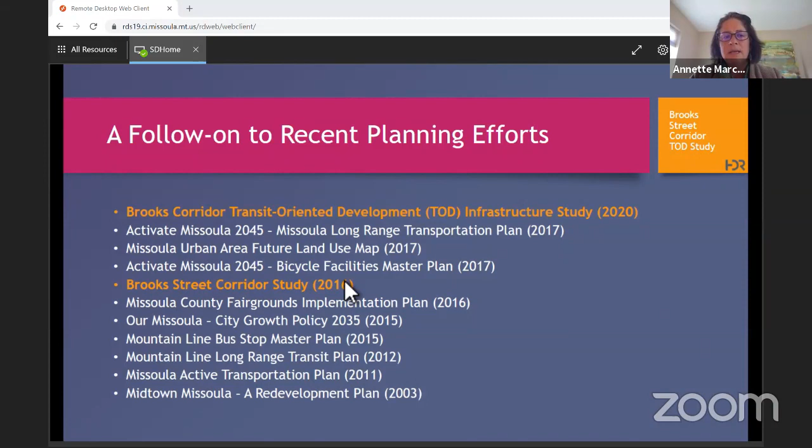This TOD study that we're presenting today, funding was provided through a whole coalition of groups. MRA has funding, and Mountain Line, the city's development services, so the transportation department and land use planning department, the county provided funding, and the Midtown Association provided funding.

And collectively, and I think you're all aware of this, there's a group that we've referred to ourselves as the Midtown Mojo Group, that is a collection of city, county, Midtown Association, Mountain Line, MDT, a whole collection of folks, we've probably numbered up to maybe 15 people at any given time. So it's a broad coalition of groups and folks who are participating in this vision and all working together on this.

So the study area, and this was established in the 2016 Brooks Corridor Study, extends for approximately 2 miles between Reserve Street to essentially the southwest, and Mount on the north. Loosely, the 2016 Brooks Corridor Study extended approximately a 1/4 mile to either side of the Brooks Street corridor. This study primarily focuses just on the Brooks Street corridor, but takes a look a 1/4 mile on either side with regard to things like bicycle and pedestrian connectivity. And are there opportunities perhaps to close some streets, to consolidate curb cuts, to simplify some of the issues, especially traffic issues that are occurring on the corridor.

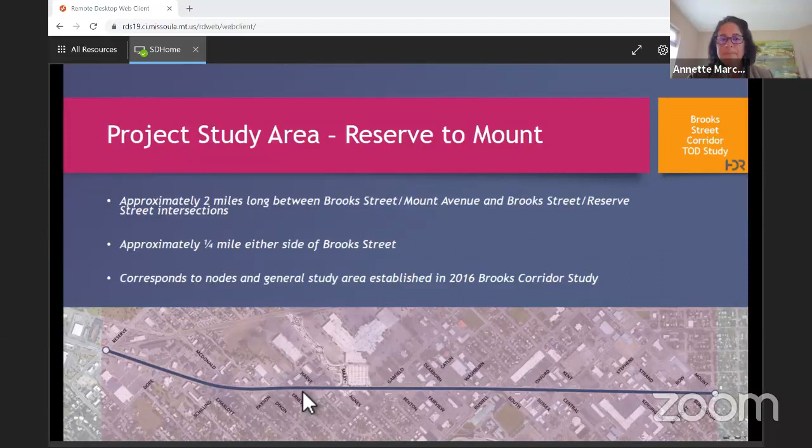So with that, Tim, maybe I will turn it over to you just a little bit to talk about how HDR approached some of the existing conditions and some of the things that you found. And then we can just kind of proceed from there. Yeah, sure. Everybody hear me okay? Mm-hmm. Great. Thanks for having me, and thanks for the good introduction there, Annette.

So the basis of starting with the existing conditions is, again, building on a lot of the studies that have already been completed, and then looking at publicly available information such as cadastral and other things, especially from a right-of-way perspective, as the right-of-way constraints change throughout the corridor from Reserve up to Mount. We took a few steps further on the previously completed studies from a land use perspective and development opportunities. So we worked through a few of those tasks and additional information to expand upon those as well.

Also had a few of our folks, both from a planning level study expertise area but also from a transit expertise area, walk the corridor, look at pictures, try to be present to physically watch how pedestrians are interacting within the corridor, how vehicles are interacting within the corridor, look at how approaches are functioning, both from an ingress and egress perspective. And then leveraging that to really put together as much of the data as we can to bring forth to the working group as we started developing the plan. I think we can go to the next slide.

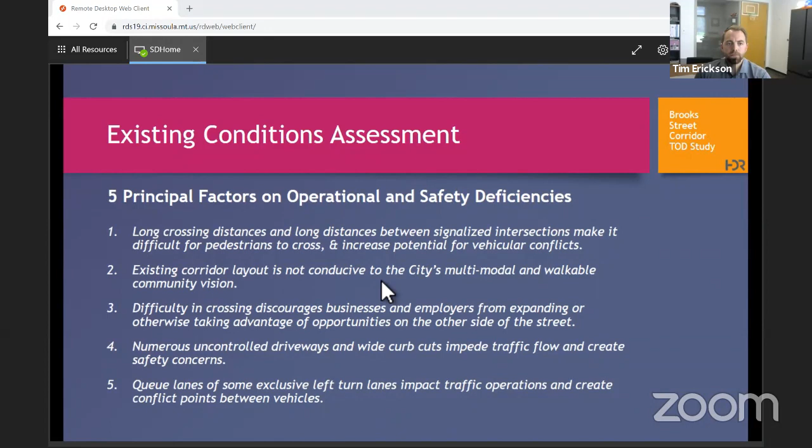So overall, with the existing conditions assessment, heavy traffic volumes, numerous driveways, high crash rates, and the lack of pedestrian and bicycle accommodations really is what set that foundation of coming up with what we're now saying is transforming the Brooks Street corridor.

And I think it's important to note, to me, this was a really critical phrase that came through in the report. It's not functioning, we may think it functions fine, but it really has so much more potential, and it's really not functioning up to its community resource potential. I mean, we all know that, but that was something really important to reinforce.

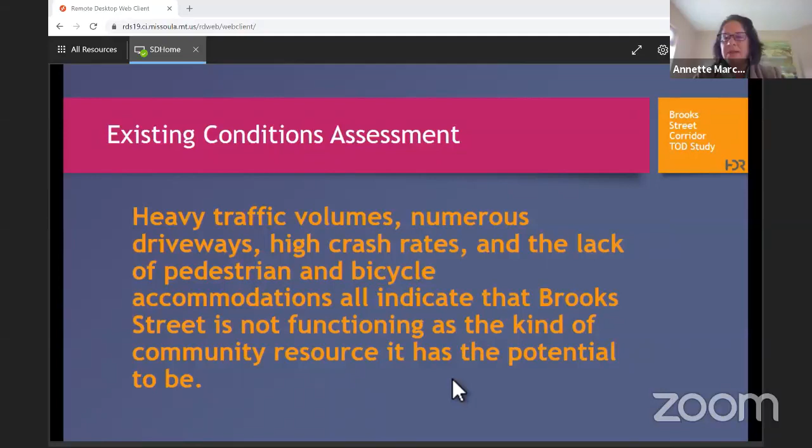So making the most effective use of existing right-of-way. We mentioned the right-of-way constraints already, and there's definitely going to be further analysis needed to get a detailed account of potential right-of-way impacts. But the goal would be to make as many improvements within the existing right-of-way as possible. Define access improvements to enhance safety, while also maintaining or improving overall visibility and accessibility to businesses.

Providing safe and more frequent pedestrian crossings on Brooks Street. So being able to, again, provide those opportunities for the multimodal users, the non-motorized users within the corridor, that can encourage that use within the corridor there. Creating a corridor identity through the placemaking. Again, that's with the streetscapes and the landscapes.

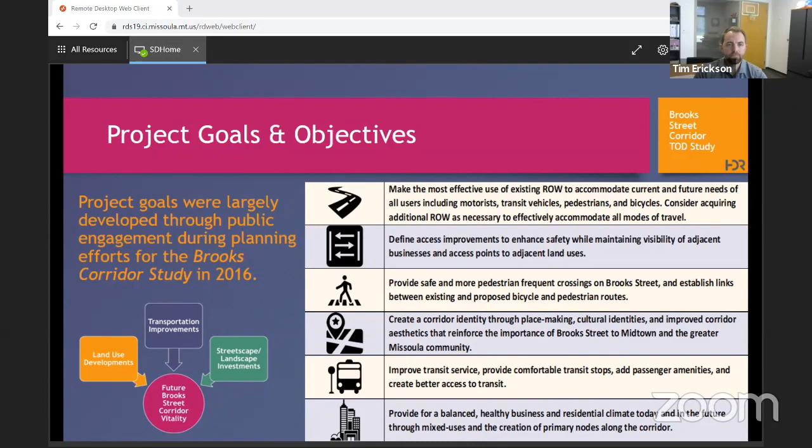I don't think so. Most of this information came right out of the report, and so when you have the full report in front of you, you can spend more time really sifting through it. But I think the important thing is what Tim just touched on, the four big issues that it synthesizes down to: we need to address connectivity, we need to address development at those established or identified development nodes.

We need to address safety and access management, and then in order to make this a place not just functional, but a place where people want to be and want to spend the time, really take a look at the aesthetics and the visual relief. So the streetscape and the placemaking of the street.

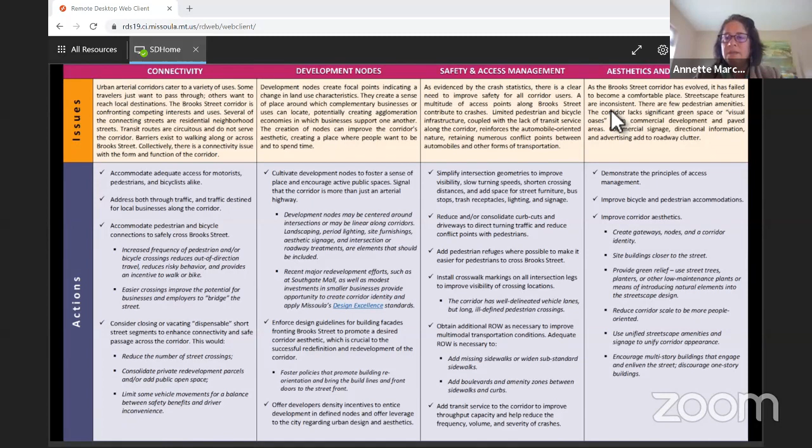So in the next few slides, we'll get into how we started looking at alternatives and what options are available for transforming the corridor. And that started with the basis of our design concepts. Again, pretty much a summary of things that have already been mentioned: extensive field reviews, understanding what current constraints are, overall baseline conditions of the road, the intersections. We did some baseline traffic studies, gathered as much information as we could from the previous studies as well. Overall input from stakeholders and local governing entities.

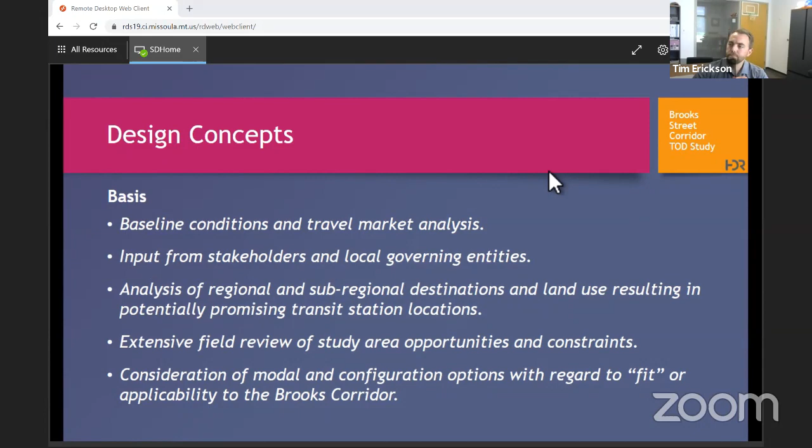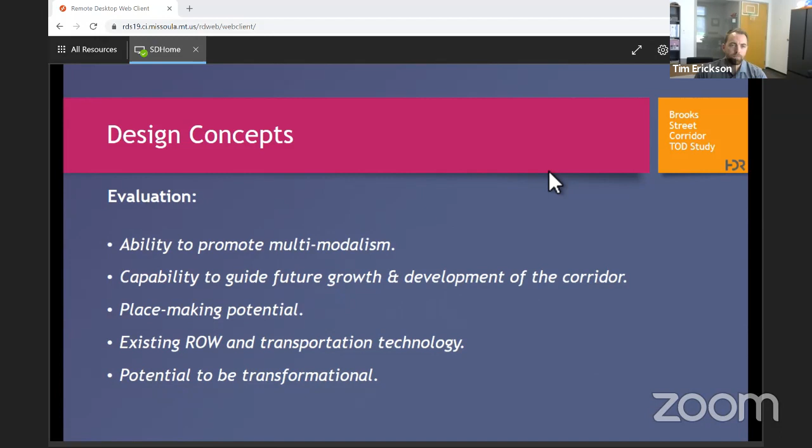So through the evaluation of our various design concept alternatives: ability to promote multimodalism, capability to guide future growth and development of the corridor, placemaking potential, existing right-of-way and transportation technology. I think that's an important one to remember. We use the term, I believe, future-proofing the corridor. So understanding what technologies we know of, but also knowing that technologies change, and how does that play a role in the future of transit-oriented design, and also the bike ped and also for the vehicles. Can't forget about the vehicles using the corridor as well. And then the overall potential to be transformational.

Mm-hmm. Yep, go ahead. Thank you.

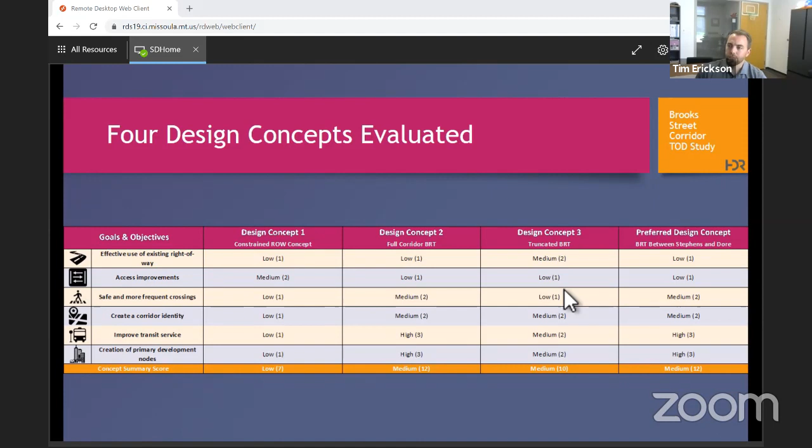So overall, we came down to 4 design concepts to be evaluated. In reality, it was 3 design concepts, and the 4th kind of morphed from the initial 3. Design concepts 1, 2, and 3 were the initial ones that were developed. I believe the graphics on the next slide get into them a little bit more. We looked at them and then ranked those based on the criteria, goals, and objectives that are shown off to the left-hand side. So design concept 1 is the constrained right-of-way concept. And I'm just gonna pull up the overall report separately on my screen that you can't see.

Again, you can read about this more later, but for design concept 1, we looked at infrastructure design concepts focused on improvements mainly to the intersections within the corridor limits, so within the Reserve to Mount corridor limits, providing bicycle and pedestrian facilities and amenities. In this case, transit would actually stay within the existing travel lane. So this was focused a lot more on bus stops off on either side of the road, and then looking at signalized improvements and access improvements to improve the safety of the corridor for all users, as well as maintaining the vehicular traffic on the corridor.

The second design concept, which we're terming the full corridor BRT. BRT stands for Bus Rapid Transit. This is looking at having a center running BRT right down the middle of the corridor. Think of where raised medians generally would be, right in the center of the roadway, having buses run on dedicated 15-minute headways, and they have a dedicated travel lane within there.

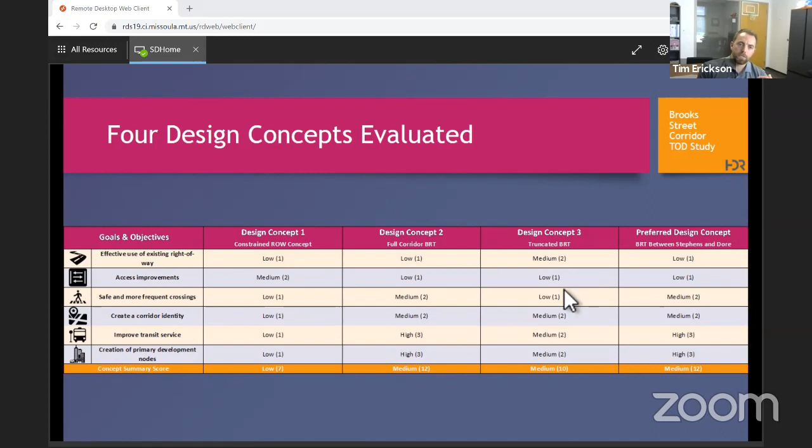What ended up becoming the preferred design concept is actually kind of a mix between design concept 1 and design concept 2 to an extent. We focused a lot on intersection improvements while also being able to incorporate a center running BRT lane. One primary difference between this concept and concept number 2, and you might be able to see it on the graphic that's on the screen, is on the southern end, the center running BRT would end at Dore Lane.

And this was through collaboration with Mountain Line. Obviously there's need for accessibility to Walmart and other locations there, and if you continue to Reserve, it could actually cause some complications of trying to get from a center running BRT through Reserve, making the turns either on Reserve or down further to other areas that transit wants to serve. And so we actually found that terminating the center running BRT at Dore Lane provided some enhanced opportunities for transitioning in and out of that center running BRT.

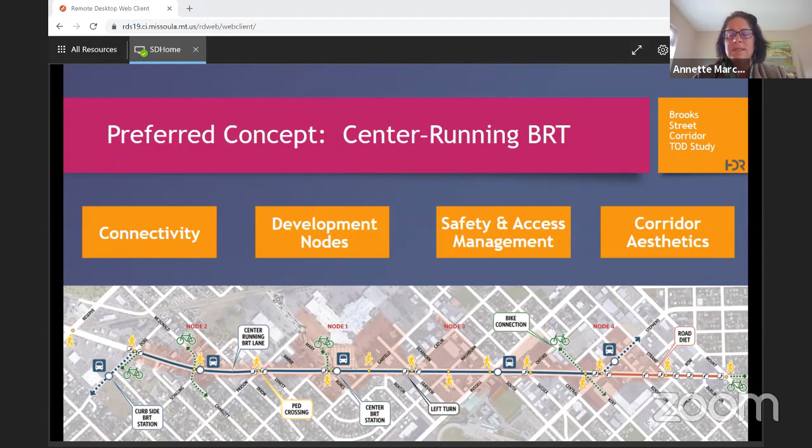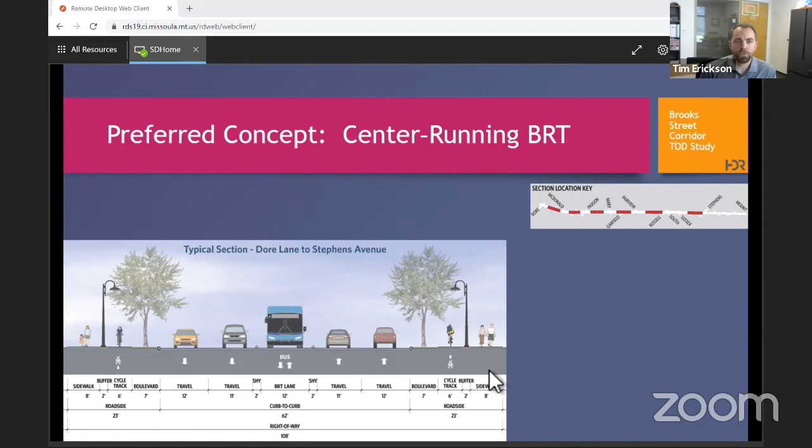So an example of how it accommodates future needs is if you only wanted to install a sidewalk and accommodate the right-of-way based on that, then in the future, if there's a substantial uptick in the non-motorized users or wanting to look at opportunities to have a cycle track or multi-use path, then there wasn't enough right-of-way or enough available space planned for from the beginning to accommodate that. So we wanted to take this to a grand vision, again, transforming the overall corridor. And you can see that with these typical sections.

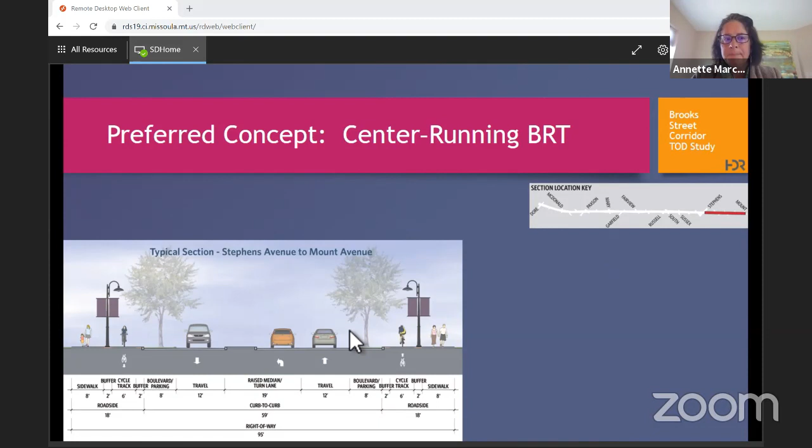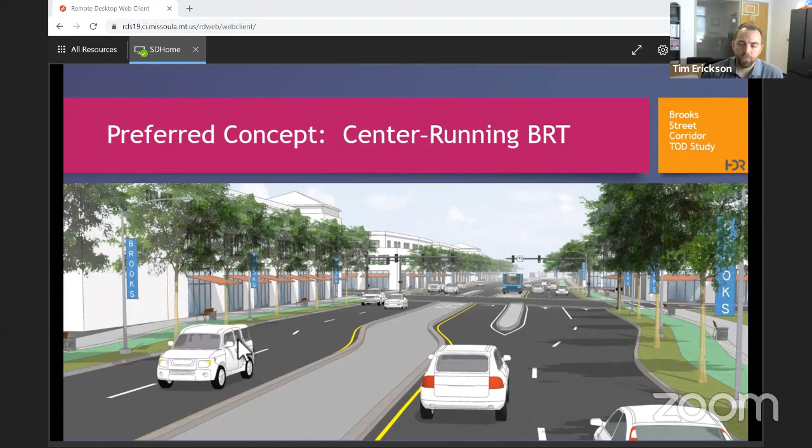So probably not a lot more to narrate with these next few, but just a few seconds on each one of these next few slides, just to really help portray the vision that the group came up with as we developed the overall plan that, as Annette alluded to, was finalized towards the end of last year.

Nancy, you have a question? Mm-hmm. I'm sorry, I'm having a little difficulty with this concept. It appears from the drawings that the buses are going in the opposite direction of the traffic for the side of the street that they're on. Is that right? If you go back. Right here. So these cars are coming in this direction, but the bus is going in the opposite direction.

So in that particular case, we can talk about that in more detail. And I'm not a transit planner myself, so apologize if I don't have the exact answer. But more importantly, this shows that it's probably aligned specifically for how a station would want to transfer its users, based on how these stations get placed. And this is the only place that has them on either side. I think that we could work that out, and quite frankly, it could be something that accidentally got flipped just in the rendering itself.

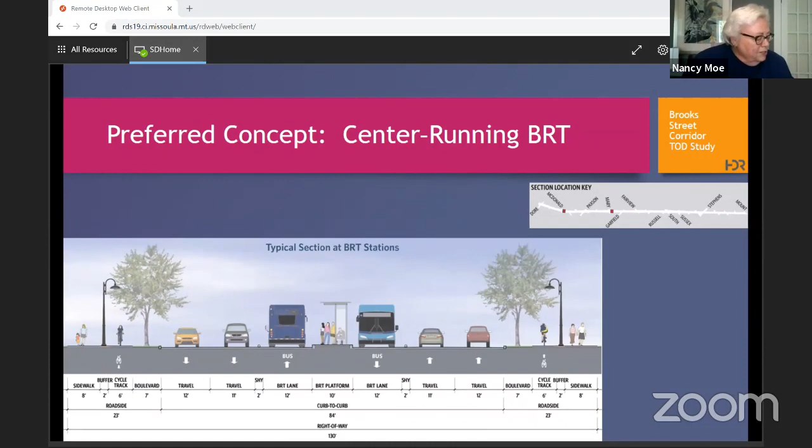But I have another question, and that has to do with Reserve to Dore Lane. And I understand this map and what it is trying to do with that. But is there a transition, I guess you'd be coming north on Brooks from Reserve to Dore? Is there a transition necessary there? I mean, all of a sudden we have a center lane BRT.

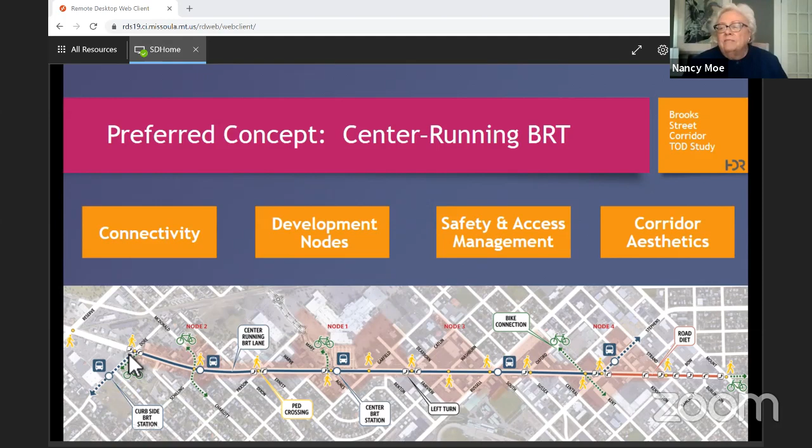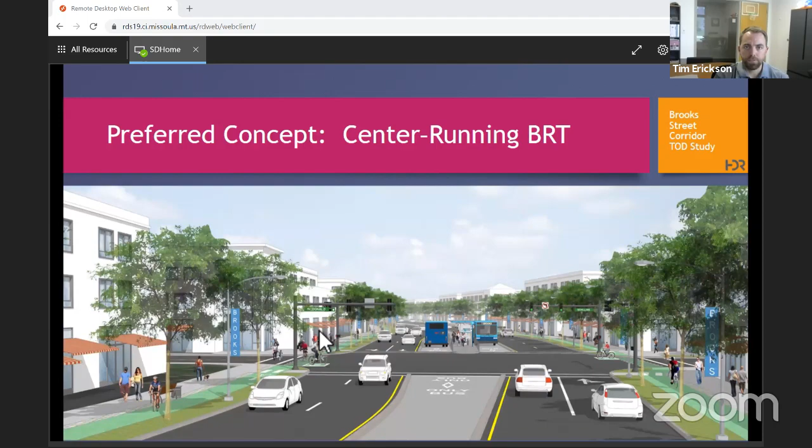Yep, that's a really good question. So there is a transition. There's a few different options, and really we tried to address it more in the text, I believe, in our study, that the transitions are required in the locations across the United States that have center running BRT. We can provide some pictures and things there, but as far as the transition, yes.

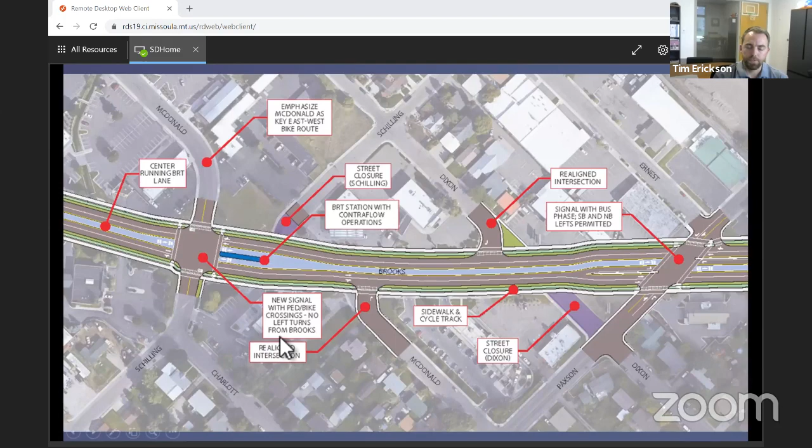So you actually work it into a dedicated phase in the signal itself that allows buses to get in and out of that center running at those specific locations, and also on the north end as well. So not just here, and you set up the signals appropriately to accommodate the in and out, while at the same time having minimal impact to the vehicular traffic and not causing any additional confusion or issues for the non-motorized users, and not increasing the overall conflict opportunities there.

Okay, thank you. Just to clarify for me, are we being asked to agree with this concept so that HDR can go forward based on this concept to accomplish what is stated in the motion, engaging MDT and determining right of way needs and impacts? Are we being asked to agree with the concept, the preferred concept? Yes. Thank you.

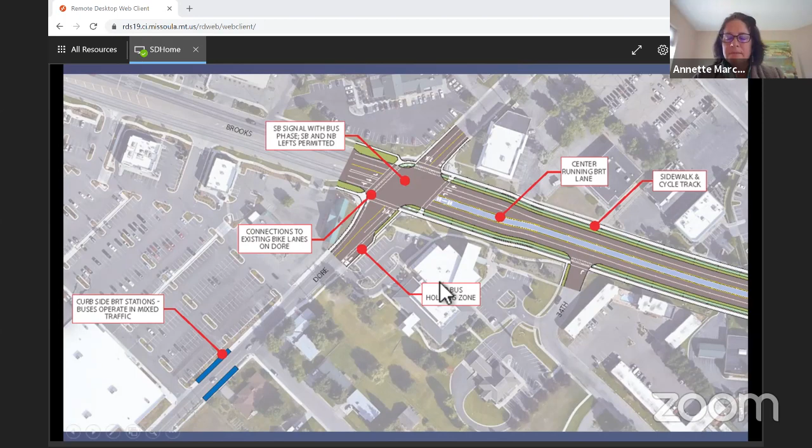Thank you, Carl. Any other, or Annette, are you guys done? Any other questions? I'm done, thank you. What about any other questions from any other board members? Yes.

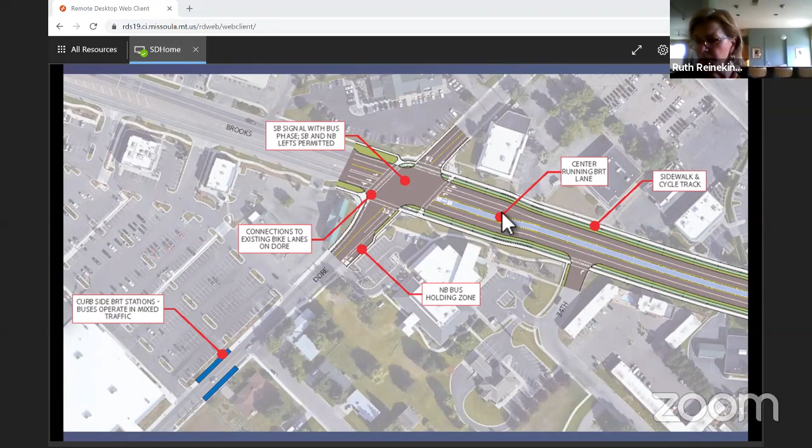Not so much questions as maybe some emphasis on a couple of points that have already been made. You had a slide early on about the existing conditions assessment, and number 3 mentioned the difficulty in crossing that discourages both businesses and employers from expanding to take advantage of opportunities on the other side of the street. And it's good to keep in mind that the Puma study identified that there are 2,000 businesses along the Brooks Street corridor that employ 17,000 people.

Those are a lot of people that could utilize the bus system if it's running consistently, whether it's down the middle or on the lanes, but if it's consistently 15-minute bus service on Brooks itself, that's a lot of people that could utilize that. And in that area, there's also a population of 16,000 people for which Brooks is a definite corridor for accessing the other side of the street. It's a barrier.

And I think the safety aspects of being able to breach that barrier are worth emphasizing. The opportunities for economic development with the permanence of the bus, and knowing that Missoula is going to continue to grow, are really quite great, and that needs to be emphasized as well. What didn't get mentioned is the function of Brooks Street: we say it is functioning, but studies have shown that 20 years from now it's going to be maxed out, and the time to address that is now. So I'm very much supportive of this, and thank you for the presentation.

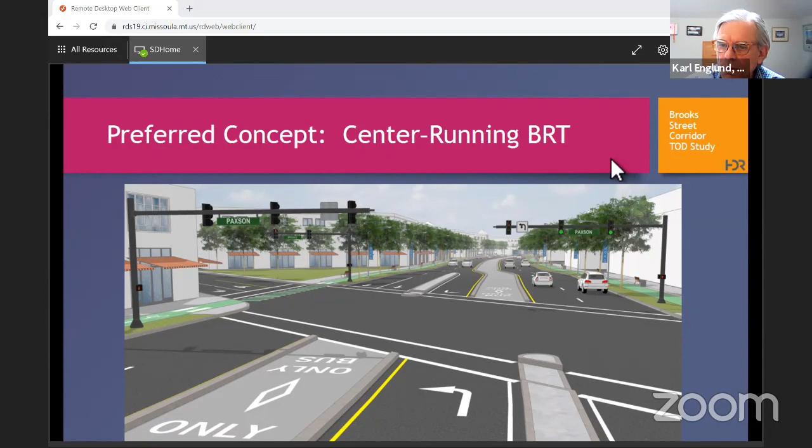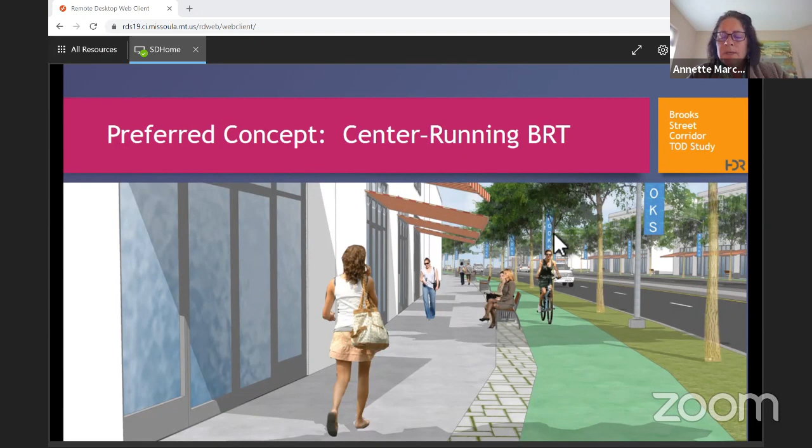My question, if I may, is does the $30,000 that we're asking to spend right now get us to those points? We think it does. Well, so initially, when we had completed this study and had a center running concept that we thought was worthy of, and I think Ellen really nailed our thought process.

It seems to be a very transformational concept that addresses a lot of the existing issues with the corridor right now. But we don't know how feasible it is. And so we know the things that we need to study to understand whether it's a feasible concept. But rather than undertaking a full study with all of those pieces, we know that there are probably two of the most fundamental issues that we need to understand.

How accepting of this concept will MDT be, and can we get them to come to the table as an active partner? And we don't know that. We just don't know that. We've had representatives from MDT on the Midtown Mojo group, but in order to get full buy-in from MDT, we probably need to go higher up in the agency. And we just haven't gone there yet.

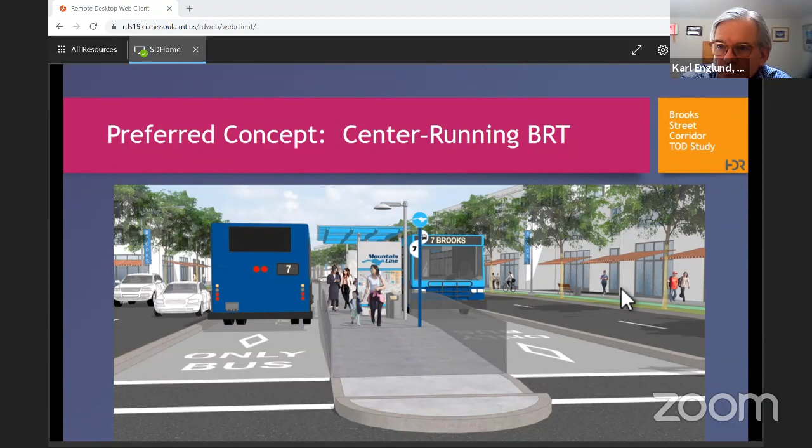Anything else from anybody? Questions? Jill, if you would, we'll probably have a motion here in a minute. Yep. Can Annette stop sharing her screen? Thank you. Let me put up the numbers while we see if we have a motion, so that if we do, we can get stuff done more quickly.

Karl, I just had one question. Yes, please, Tasha. I guess it's two questions maybe. What type of formality are you looking for from the DOT in order to move to the next step of evaluating the right-of-ways? Do you just need informal assurances from them that they are going to be a vested partner, or do you need some sort of agreement in place? What does that process look like?

Let me jump in on that if I could. I think we need to have them at the table as a partner. We can't do this project without a large infusion of federal funding. We know that. We have capacity in Urban Renewal District 3 to provide a healthy match, which makes us more competitive. Every year that diminishes a little bit because the clock's running on that district, but we have a lot of capacity in that district right now. But we need MDT at the table with us along the way as we refine this.

The way I look at where we are in process is, if you look at how an architectural project proceeds, you've got schematic. Well, we've done schematic. You've got concept. This is being refined to be that concept plan. It may get tweaked with public input or with some constraints that we don't know are out there. We've got to have MDT at the table with us, supporting this project and willing to say they will support it publicly and in writing when we go to the feds for funding. So I think that's an evolutionary process as well. Once we know we can secure federal funding and provide the matches that are needed, then I think we go right straight through design, development, and construction documents and construction.

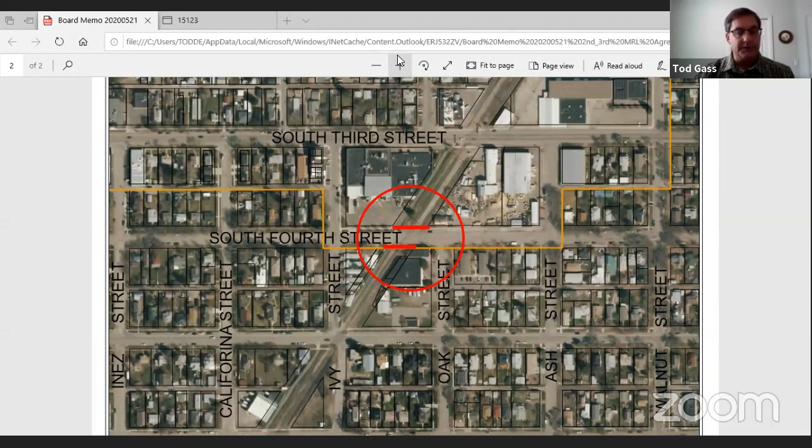Okay, questions? Joe, you want to put the numbers up there? Because I think we're going to have a motion in a minute. Questions from the board about this topic? If not, yes, Nancy. Nancy, you're muted. Sorry, Tod, does this reduce the Shadow Asphalt project contract? No, it does not. As far as cost, is that what you're asking? Yep. No, that's baked into the cost. MRL has shown us where to stop our sidewalk construction work, and they'll pick it up at that point, go across the railroad tracks, and then we'll pick it up on the other side. Thank you. Is there a motion, please?

Well, all right, I'll move to authorize MRA to enter into an agreement with Montana Rail Link for the MRA to purchase and transport prefabricated cement railroad crossing panels in an amount not to exceed $5,741.25, with the understanding that MRL will supply the labor to install the cement panels at the South 4th Street Railroad Track intersection, and authorize the MRA board chairman to sign the agreement.